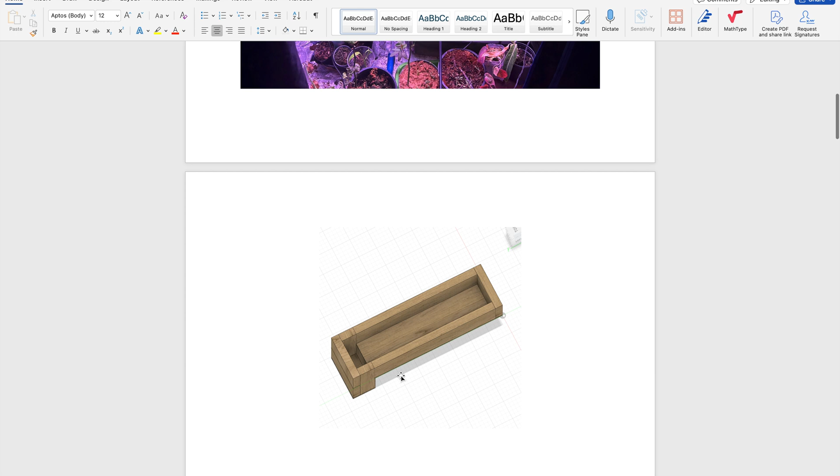So the approach that I'm going with right now is some sort of flood tray. So basically, I'll have the plants sitting in this little thing right here, and this will lay across the wire mesh. And then in this little box down here will be some sort of bulkhead with a tube going down to a lower reservoir just to store all the water, and then the water will just pump back in.

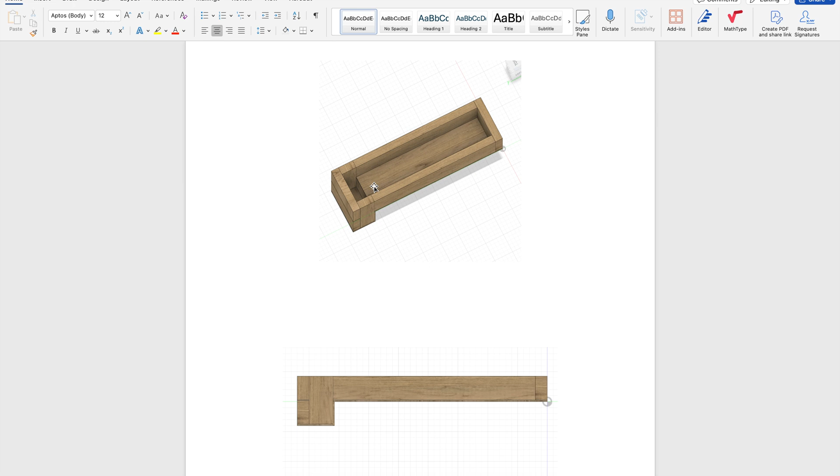And it won't be on all the time, it'll be probably once every 2 days or so, just to water the plants. And I want them to flood to a height of about half an inch, so that the water level doesn't get too high, but they get enough height where they can suck up the water. So this is some of the stuff I was thinking of when I was designing this.

So I want the goal to be to get the upper tray to flood at a height of about half an inch or so. And how am I going to do this? I'm going to change the flow rate of water in, or change the drain hole size. So I can achieve this either in a steady state where the water level remains at some sort of equilibrium at the desired height, or by just turning off the pump at some time when the desired water height is reached. For that, the inflow rate will be much higher than the outflow rate.

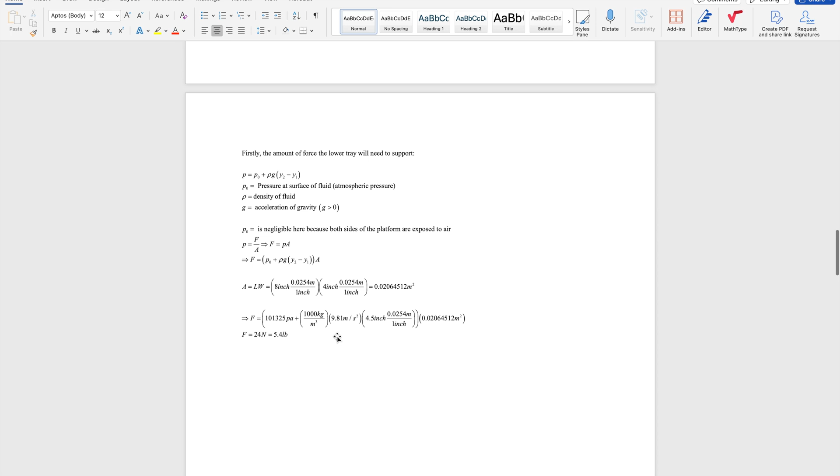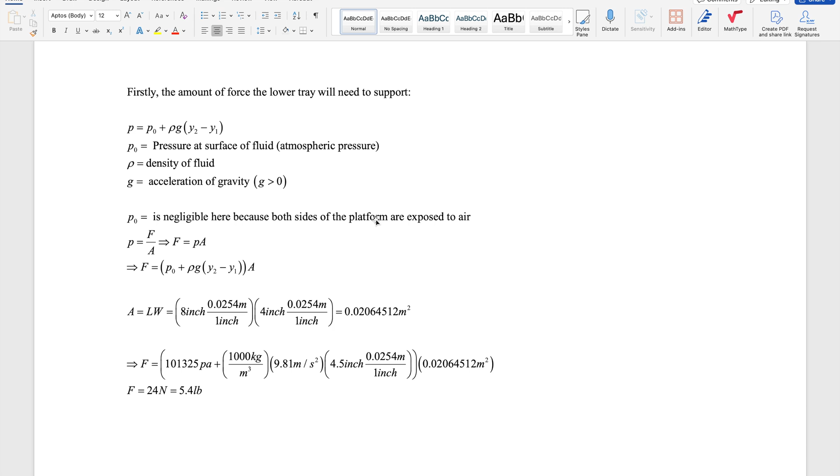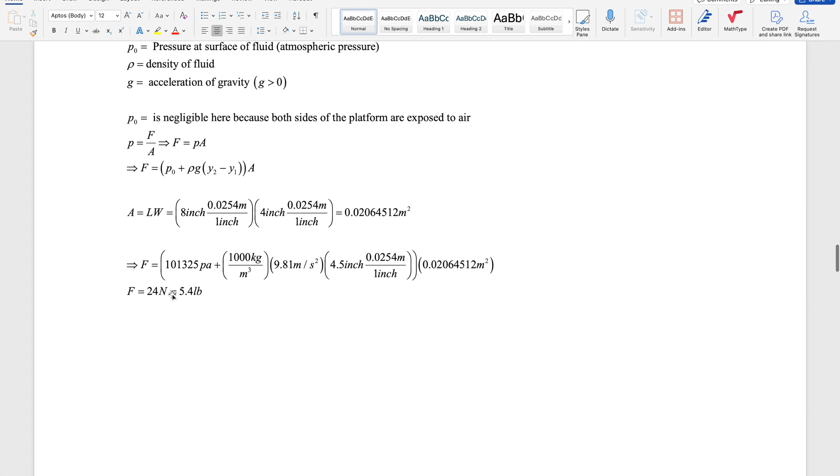But anyway, this is the equation for pressure at a given height below a water level. And right here, atmospheric pressure is negligible because both sides of the platform are exposed to the atmosphere, so it gets contributions on both sides which cancel out. But of course, force equals pressure times area. So if you consider the area of the lower tray, multiplied by the pressure that's exerted on it, I can see that I should expect about 5.4 pounds, which is pretty reasonable. So I don't see a design flaw with that.

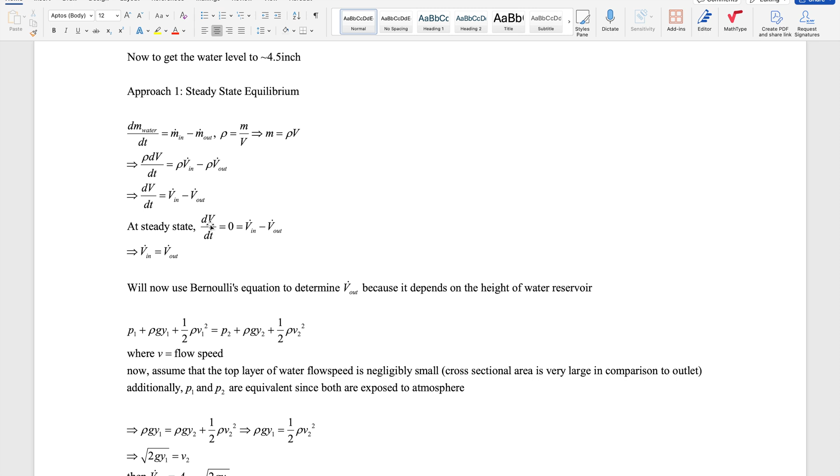And now to get the water to about 4.5 inches, and this is the height because I'm using 2x4s, so it has to go 4 inches from here and then about half an inch above so the plants get the water. But anyway, I'm going to start with the mass balance. So of course, density equals mass divided by volume, and then that eventually gets me to a volume balance. So at steady state, change in volume equals 0, which means that volume in equals volume out.

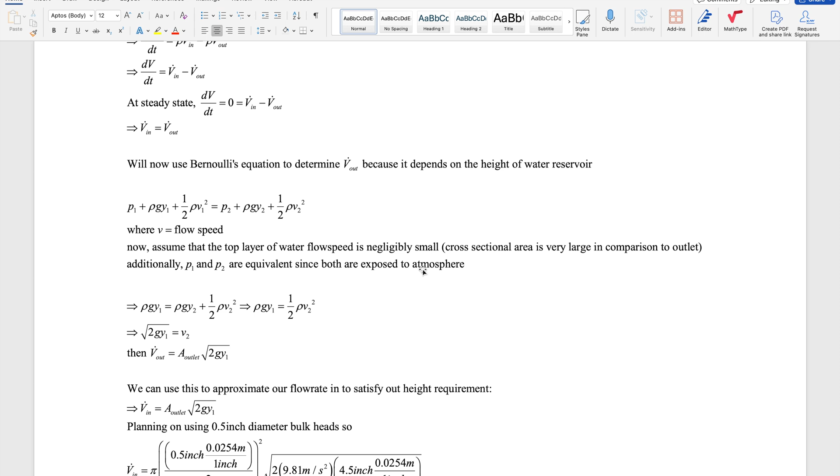And now we can use Bernoulli's equation to determine volume out because it depends on the height of the water reservoir. So this is the overall equation, and then we can make some assumptions which reduce this. So an assumption you can make is that for the top layer of water, the flow speed is negligibly small, which is reasonable because the cross-sectional area of the overall reservoir is much greater than the outlet cross-sectional area. And also they're both exposed to atmospheric pressure, so P1 and P2 cancel out.

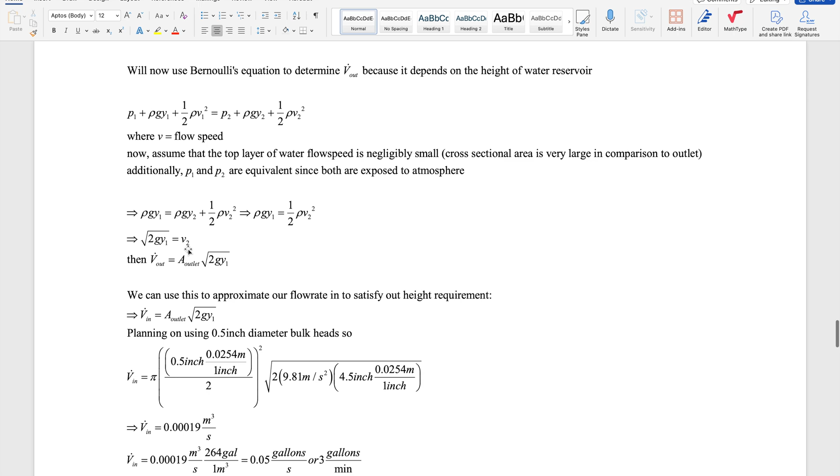So the equation reduces to this, and then I can solve for the flow speed to be this, and then the volumetric flow rate is equal to cross-sectional area times the flow speed, so it equals this. So this is our V out, and then from our volume balance we know V out equals V in. So this is our V in to satisfy our height requirement.

And then if I'm planning on using half-inch diameter bulkheads, I just plug in for area, and I can expect to get about 3 gallons per minute of flow rate in if I want to use those half-inch diameter bulkheads and still reach a steady state of 4.5 inches. And you may ask, at what time will this equilibrium be reached? And this is important because I want to know when I should turn off the Arduino that's going to be controlling the pump.

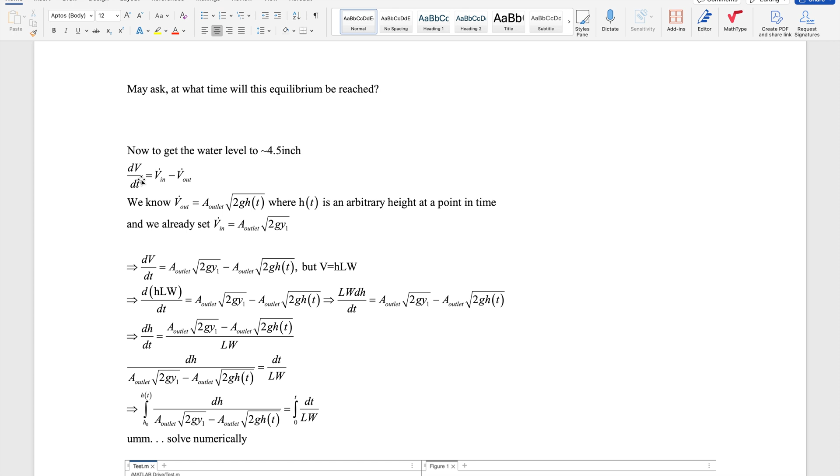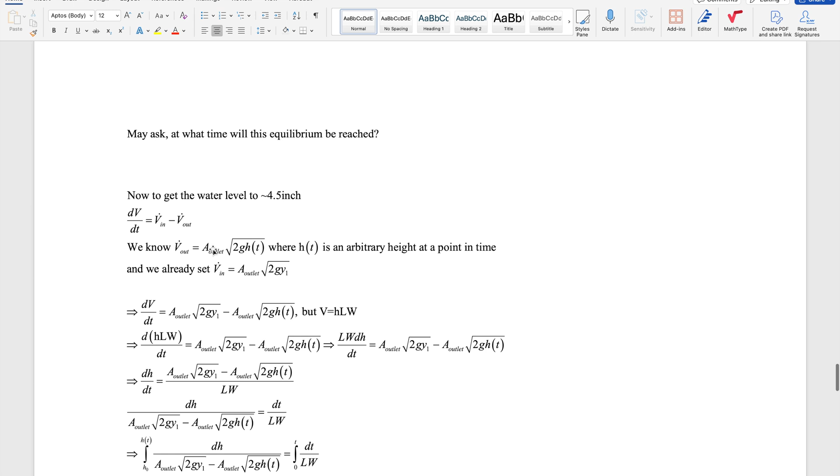So now to get the water level to 4.5 inches, I can start with my volume balance, and we can now use that the volume out is equal to the area times this, where h of t is some arbitrary height at a point in time. And we got this from up here, where V out is equal to this. This is the max V out, but this gives a V out at any point in time. And since we already said that V in equals this to give a steady state, we can just plug both of these into the volume balance.

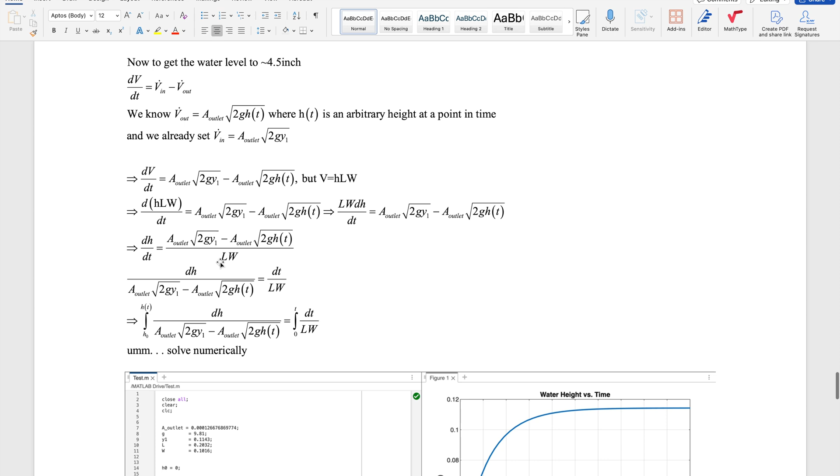And then we can consider that volume equals height times length times width, and we can just substitute that in for volume here. And the only thing that is changing is the height of the water level. So we can just pull these out as constants and then divide both sides. And we have a differential equation that gives us the change in height for a change in time. And you can solve this. I'm going to just solve it numerically.

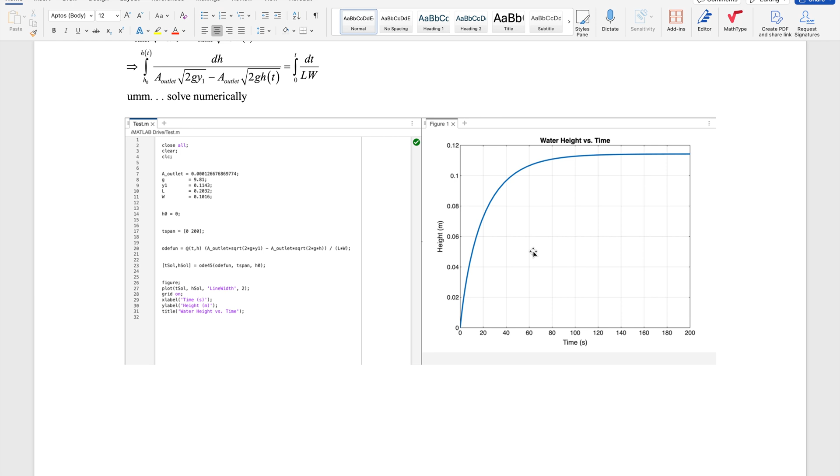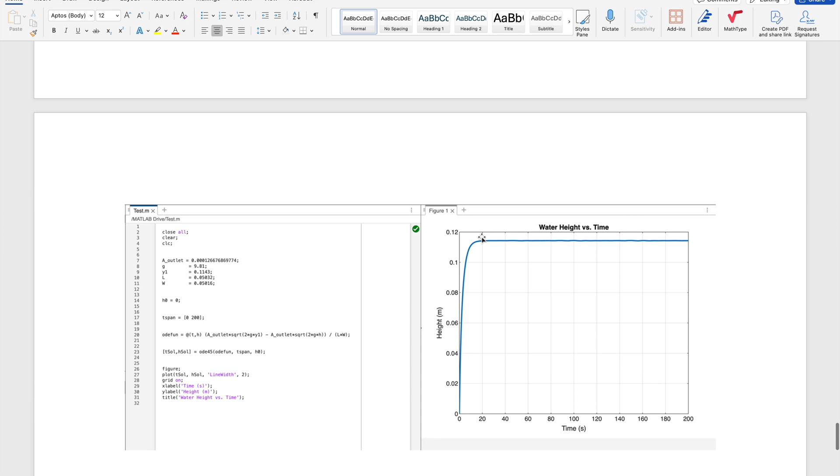And if you put it in MATLAB, it gets a graph that looks like this, which makes physical sense. And it basically means that I can expect to turn off the water and get a height of about 4.5 inches after about 100 seconds or so. And you may ask, how can I make it reach this equilibrium position faster? You can do that by changing the parameters here. So you can change how big the reservoir is, or how big your outlet is. And you can see by changing those, you can get a much faster steady state, which is also at the same height of 4.5 inches.